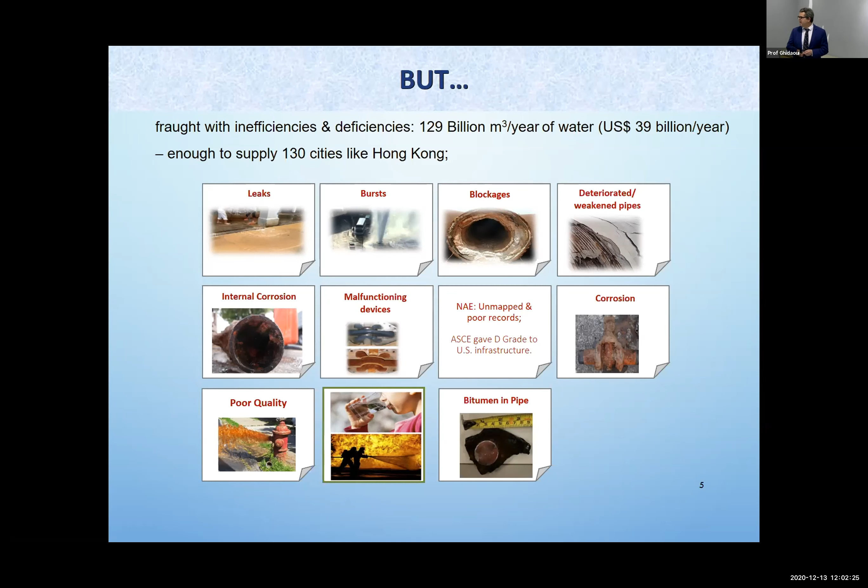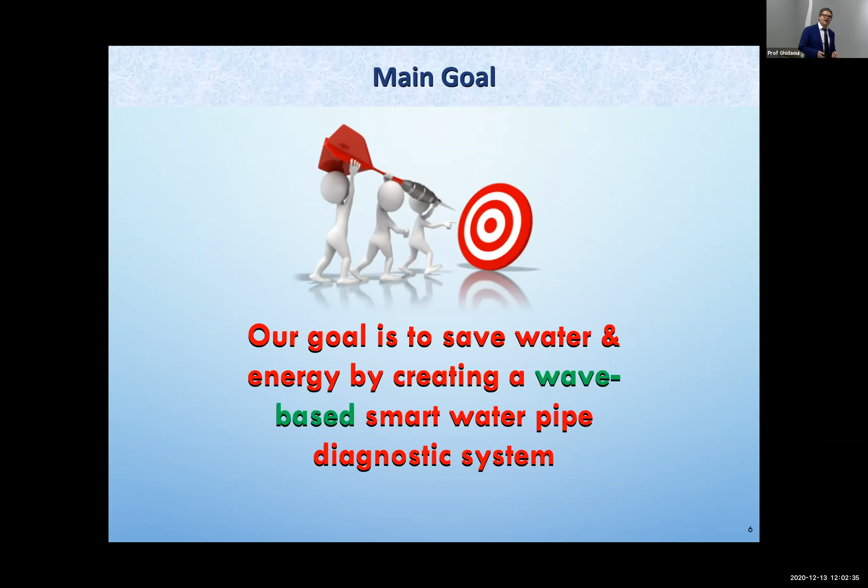So when we started, our objective was to develop a wave-based new diagnostic system, so we can actually peer into the ground and see these pipes.

Waves are all around you. You hear me through waves. Your phone works with waves. You listen to me through waves. Humanity has found that waves are one of the best things: if you have a system which is not accessible, poorly known, complex, one of the best ways is to transmit a wave into it, receive the echoes, and develop wave theories and imaging techniques to see it.

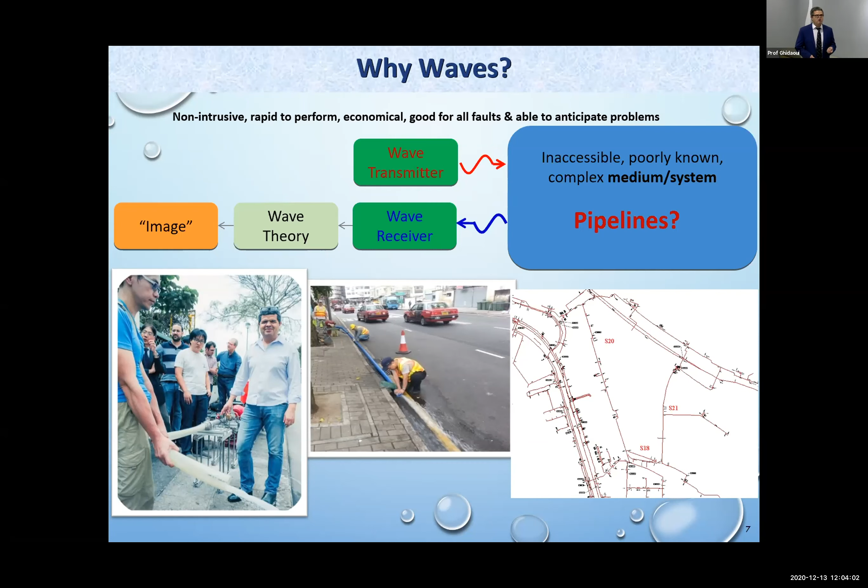So the idea was, can we do the same in pipelines? These pipelines are important, costly, and large in scale, yet our waves are fast—they travel at a kilometer per second. That means in 1 second, we could get a large sample of echoes coming back. The idea is, can we develop the wave theory and imaging to turn that into knowledge about the system? That's really where our project has been for the last 5 years.

So the mission was to understand these waves and how they propagate in pipelines much better than before, then to turn that into new and novel diagnostic techniques. Of course, we also needed to develop the experimental methodologies, labs, and field tests to confirm our findings.

So where are we in all of this? When we started, you start with what you know and try to build on that. We did that for about a year and a half. We were progressing, but frankly, I must admit we were not progressing at the rate I wanted to achieve all of what we promised to do.

So we needed a fresh look. We needed really a paradigm shift. We needed to think of these things in a totally different way. So of course, we wanted to see what others have been doing in other fields. It occurred to us: what are these people doing in ocean imaging, in medical imaging? What are they doing in ocean acoustics?

One of the common things that kept coming back is the time reversal of waves, which we had not attempted at all in our field. So that was something we had to learn. It became a mission in itself.

It was a lot of fun, a bit of divergence for a while, but then we had to prove it. We had to prove it theoretically, we had to prove it experimentally in our system, and we have by now. Our pipes come in different sizes and different materials, and we have to show that it works on all of them, and we have.

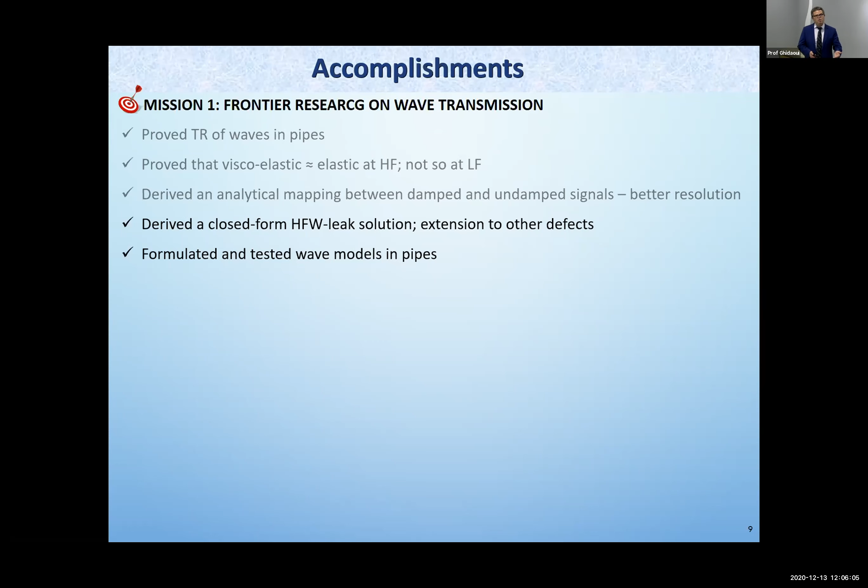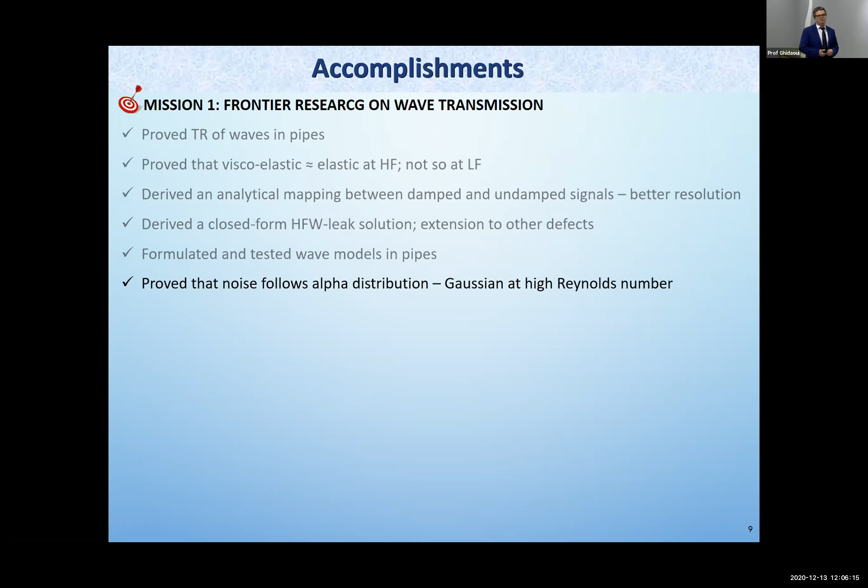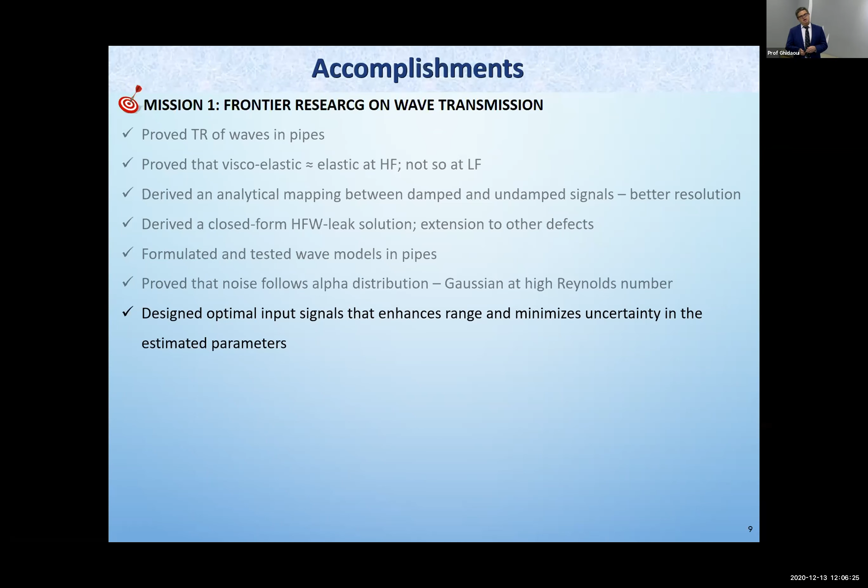Noise is a killer when you're doing diagnosis, and we now have a much better understanding than when we started about noise and noise distribution. It matters what signal you probe with. Not all probing signals are the same, and we've done quite a bit of work on that, and it's been highly beneficial.

When we started, even from a mathematical perspective, a lot of the theories had been developed with the ocean in mind. The ocean is one connected region. Pipelines are a network. So we had to make things fit to our application, but luckily we have a number of mathematicians with us to help us move forward.

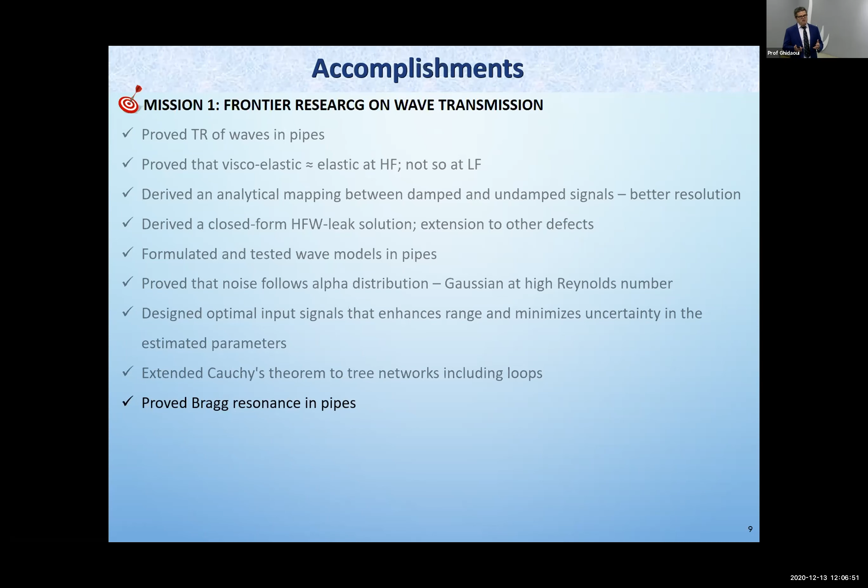We also proved that Bragg resonance is common in pipelines. This gave us a way to look at rather complicated signals and have much more insight into them.

Now that we've put in all of that, we're able to come up with a unifying framework for imaging at varying frequency. We have proved over the last 5 years that it is optimal in terms of signal to noise ratio. It's robust, efficient, high resolution, and versatile. It's no wonder it is being used in other fields.

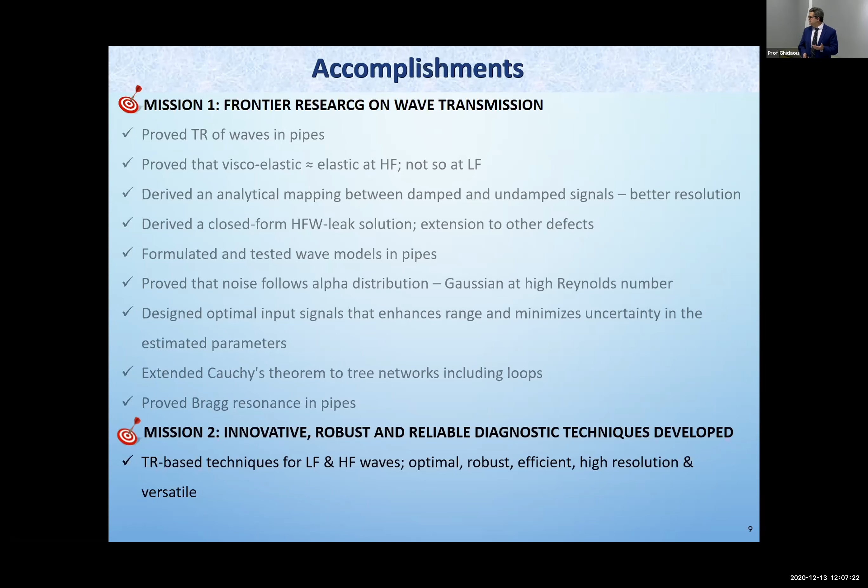Okay, so I'll come back, since time reversal is really key. I'll come back and show you a bit about it, some nice experiments that have been done by others that are visual. But in terms of facilities, let me get you to it.

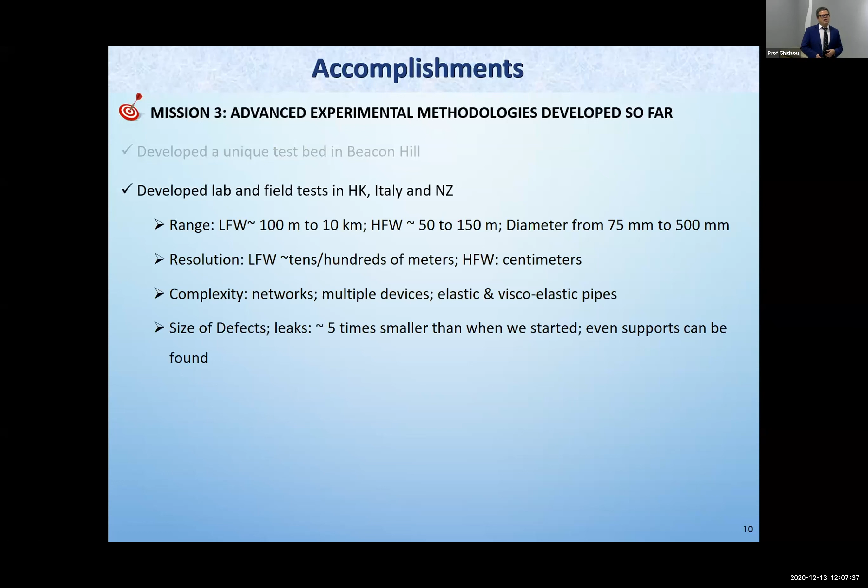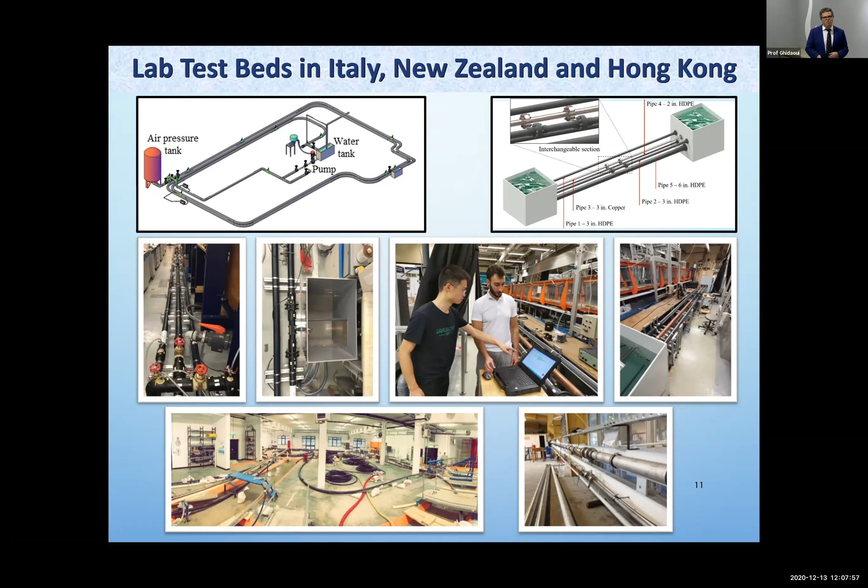So this is in our lab here in HKUST. This was built all as part of this project. We have two facilities being built, one is 140 meters long, the other about 10 meters long. These are a couple of our guys doing the testing. We also built facilities at University of Perugia through our collaboration, and this is at University of Canterbury in New Zealand.

Another signature that really came out of this is the close working relationship with Water Supplies Department. I thank them dearly for all their support throughout. They gave us this testing site. This is in Beacon Hill in Hong Kong.

This is a water supply reservoir. They have some space here, so we talked to them, they gave us the space, and now we've built a pipeline around this perimeter. These are some pictures of it. It can be about 250 meters long. We can do networks, we can do branches, we could do all kinds of testing in this facility.

Interestingly, our colleagues in Water Supplies are already using this to train their engineers to detect leaks through listening. So they've been using it.

So with the addition we have now, our vision together with Water Supplies is to make this a center, a place where smart water technology and new developments can come in, can be tested, whether it's ours, whether it's others, whether it's from different places. So hopefully we can develop this in Hong Kong. It's connected to the water supply. Hopefully we can develop it, and we're happy to have this major facility.

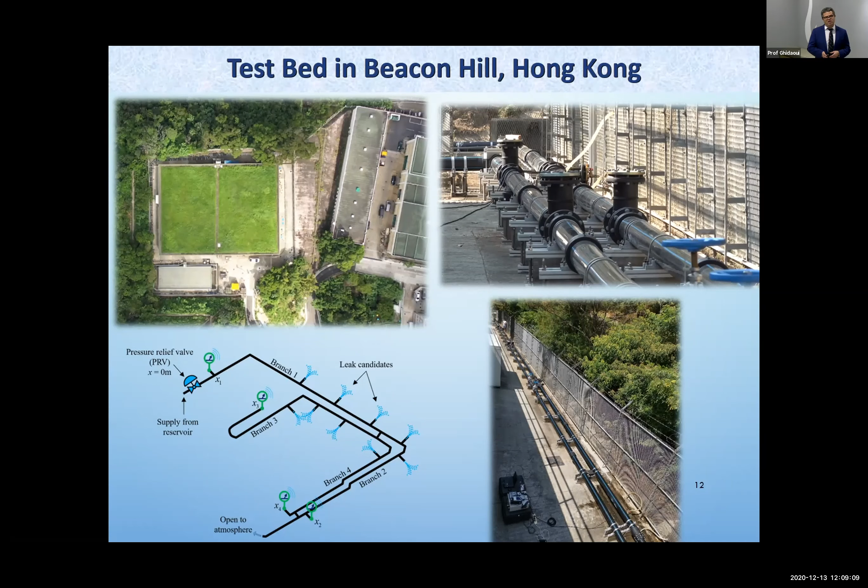This wouldn't have happened without the close working relationship with our colleagues in Water Supplies. Moreover, they were able to give us 3 testing sites in the field, so we tested in 3 places in Hong Kong. We also have 2 tests that were carried out in Italy, and I'll show you the results of those.

But now going back, as I said, one of the new things that really happened here, and we didn't even expect we'd get there, is this idea of using time reversal. We were not aware of it at the time of the application.

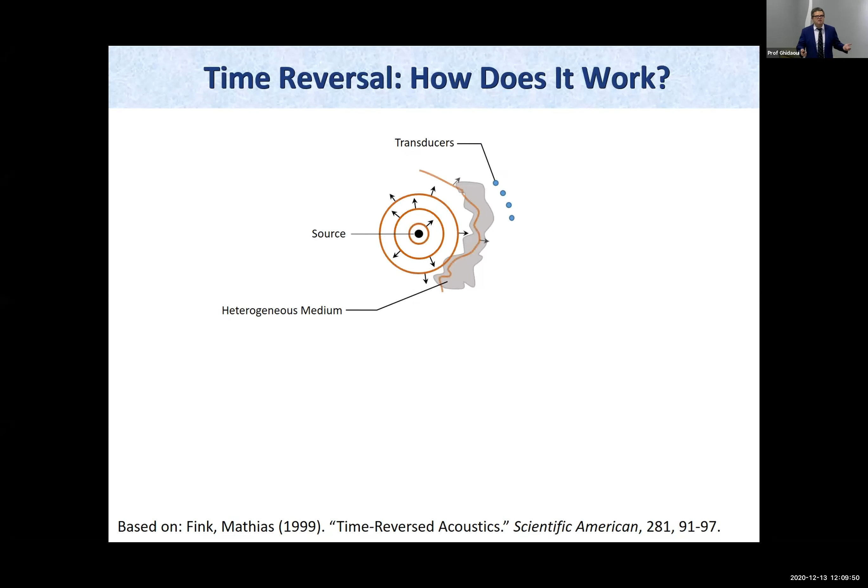So when you have a wave, there is a wave source. That wave source could be a stone. You throw a stone on a pond and you get ripples. These are the type of ripples that all of us, our eyes are used to. Imagine you have a sensor collecting the pressure at 3 or 4 locations. The principle of time reversal tells you: you take what you measure there, you flip it in time. That means you send last in, first out.

You change the chronological order. This becomes your source. And if you make those your source...

One intriguing thing about waves is they refocus back to their sources. They tell you where they come from, they go home. How sharply they refocus is actually proportional to frequency. So if you use higher frequency, you get higher resolution, more sharpness. But for us, high frequency means more damping, so we had to optimize this. We build our project around low and high frequency, and I'll show you more of this.

But this is really intriguing, you can find this on the web. It's an experiment done in Paris to show time reversal in something we can see and visualize. So they're going to drop a stone here from the ceiling.

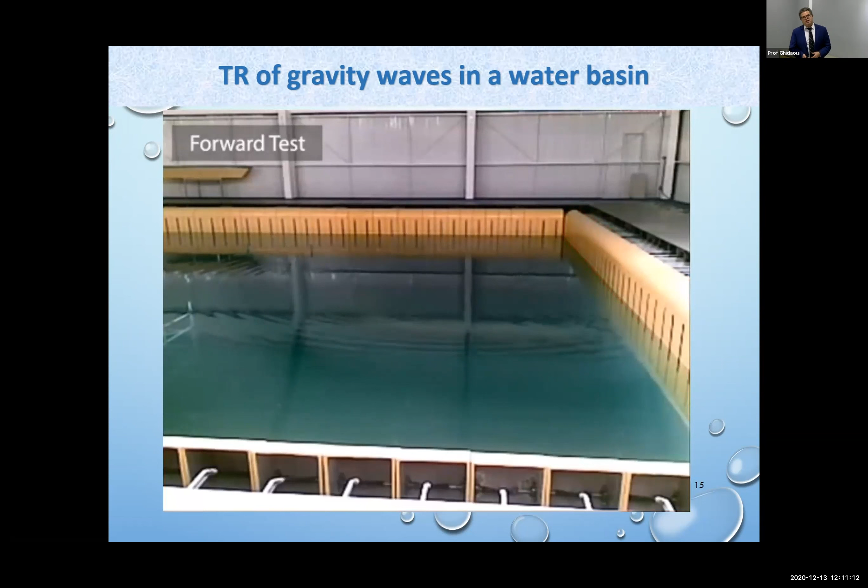The stone comes down and generates ripples. What they did is measure the pressure, or water elevation, at a couple of places. Nothing really earth-shattering about that, we'd all expect it, you see a stone, there are ripples. The intriguing part is what they're going to do now: take whatever they measured, flip it in time, and that becomes the source.

Just bear with me, because the end result is really worth it. It's cool. So now these become the sources, what they measured. We're going to speed through this video to gain some time, and slow it down when it's doing what waves like to do when you send them back.

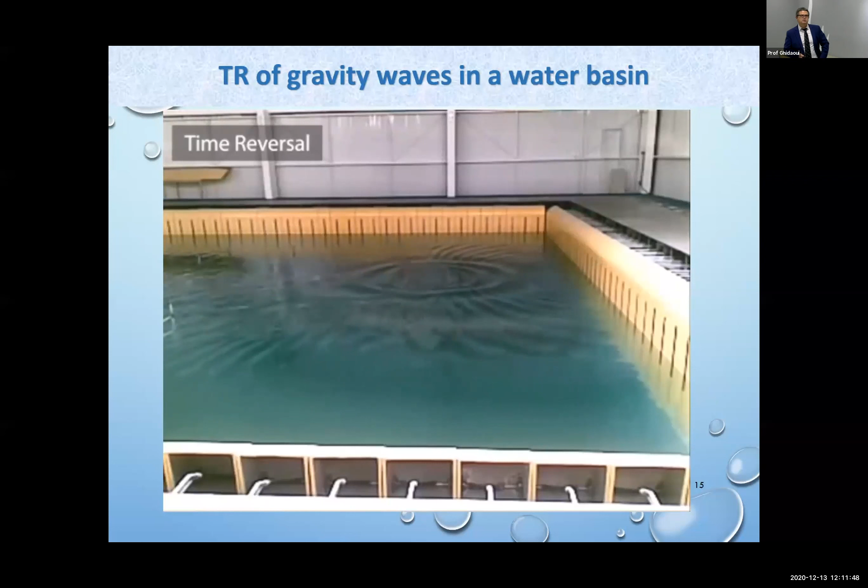So observe what happens. The wave refocuses back. You see the water splashing where the stone used to be. So it actually tells us where the stone went.

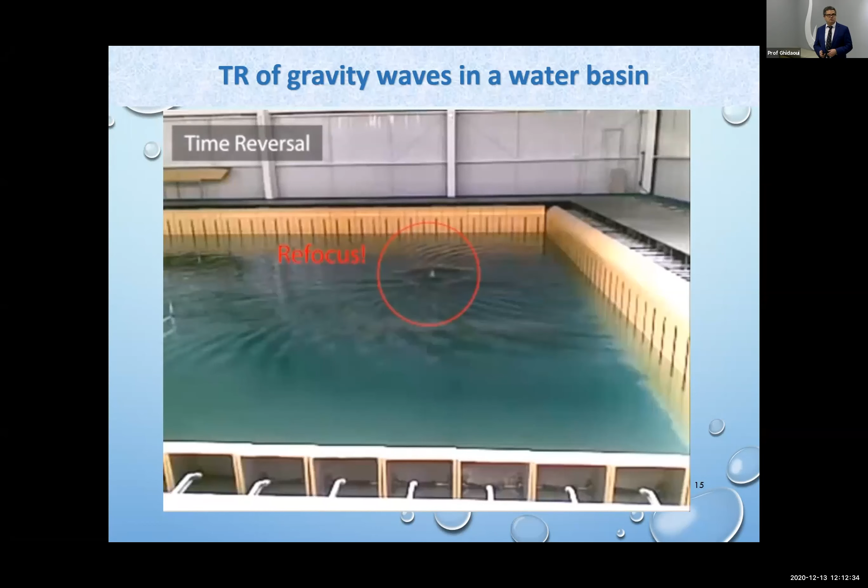So what this meant to us, seeing things like this, is that if I'm standing here measuring, and let's say you plunge into a pool or threw something in, I don't need to know where you are. I could measure and send it back to find you and find the source. To us, already signs were coming: leaks are sources, pipe junctions are sources, pumps are sources. So maybe we could turn all of this around, time reverse these waves, and they will tell us. That was really the initial thing about us starting to look at this.

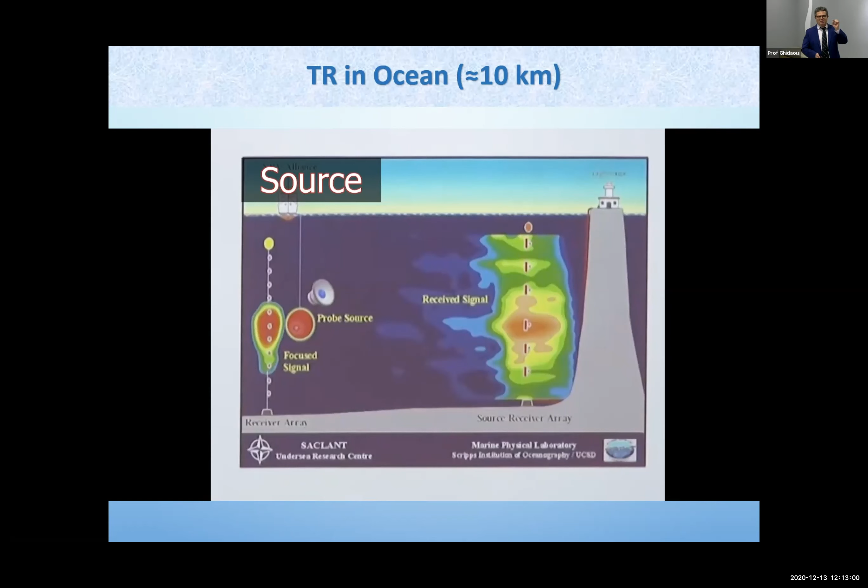Then we looked, because that was gravity waves, at acoustic waves, so we looked at what people were doing in ocean acoustics. This is an experiment, I believe done in the Mediterranean Ocean. They send a wave from here to about 10 or 15 kilometers away, and what they send is a short blip, a short compact source. So we'll hear in the video a blip, a very short sound, and then you'll hear what they're going to receive.

Now, what they're going to receive about 10 kilometers away is a very elongated signal, what we call echoes. You know when you speak in tunnels you get those echoes. Why are there echoes? Because waves go directly, but also zigzag up and down to get there, so there's a spread, what's called dispersion.

This is very nice for us because this could be thought of as the pipeline. This is our water, these are the walls of the pipe, and we have these, as I'll show you later. Now notice what happens when they time reverse this.

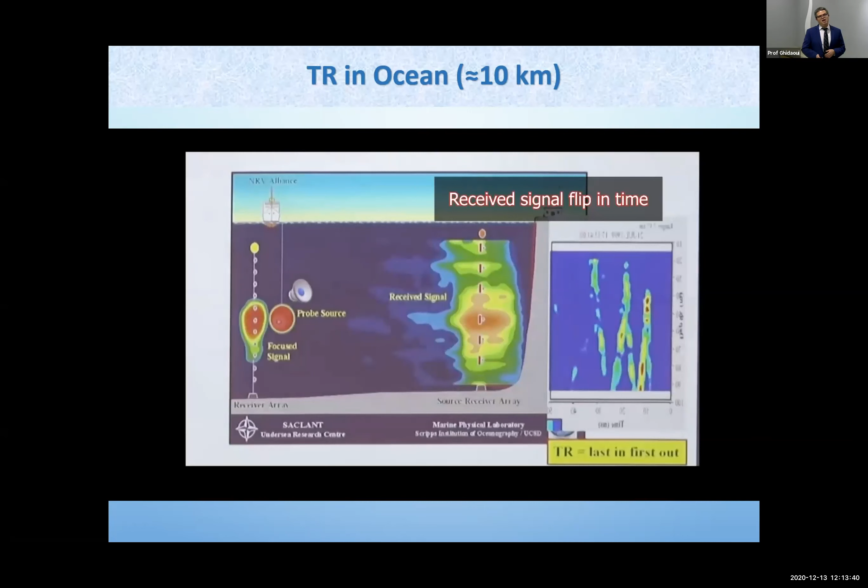So they took what they measured here, time reversed it, and they're going to send it back in the ocean. And you see, you get the compact source back. So the source refocuses again, collapsing into a short period at 10 kilometers away.

What it means again here: if there was a whale singing here, and I'm measuring elsewhere, I don't need to know where that whale is. I could just measure what I get, reverse it, and it would locate it. So these are great things at locating sources, and that's what we are after in this project.

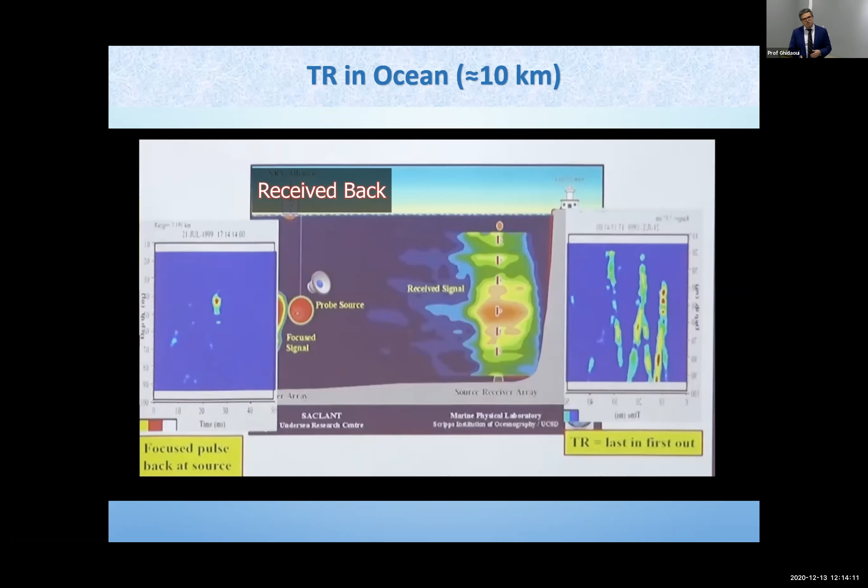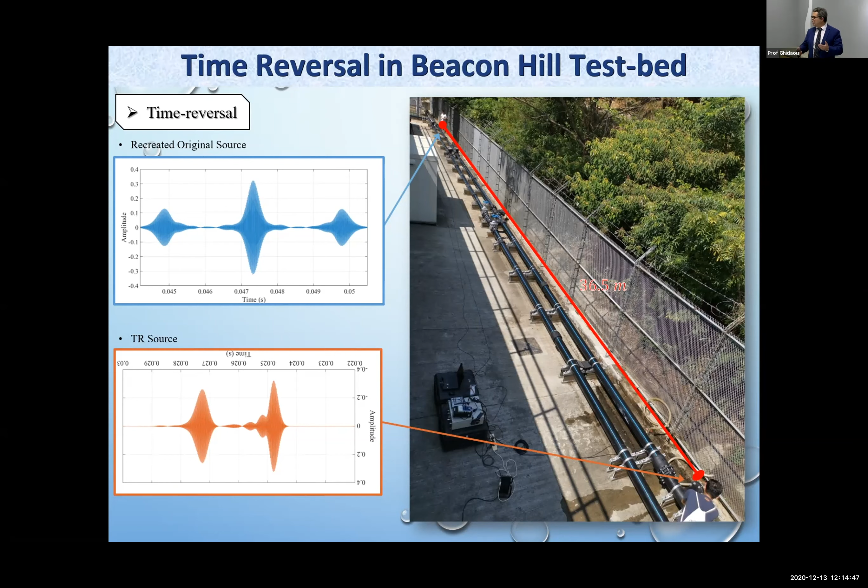So now we time reverse it, send it back, and we get the refocusing exactly at the location, but we get these side lobes. Anybody who worked on this as a scientist will know these are artifacts from the fact that you don't measure at every point, or don't measure long enough — we call them side lobes. In fact, maybe you didn't notice, but we already saw side lobes earlier: this is the focus, we know where the stone was, but there are still some ripples.

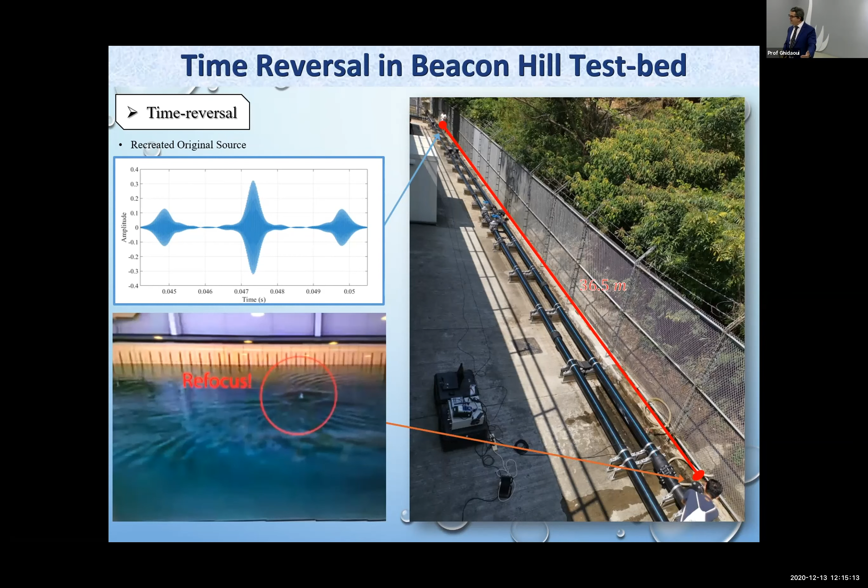If you want to get rid of these in these experiments, you measure at many more points and you will see only the signal and everything else will be quiet. What it means is if we want to get rid of this in practice, we need to measure at more places, but our system is not accessible, so we have to deal with these side lobes.

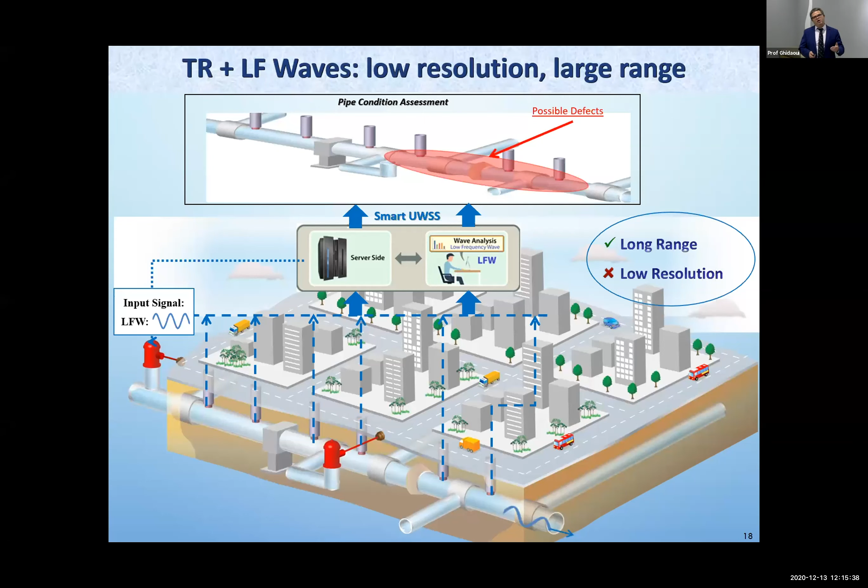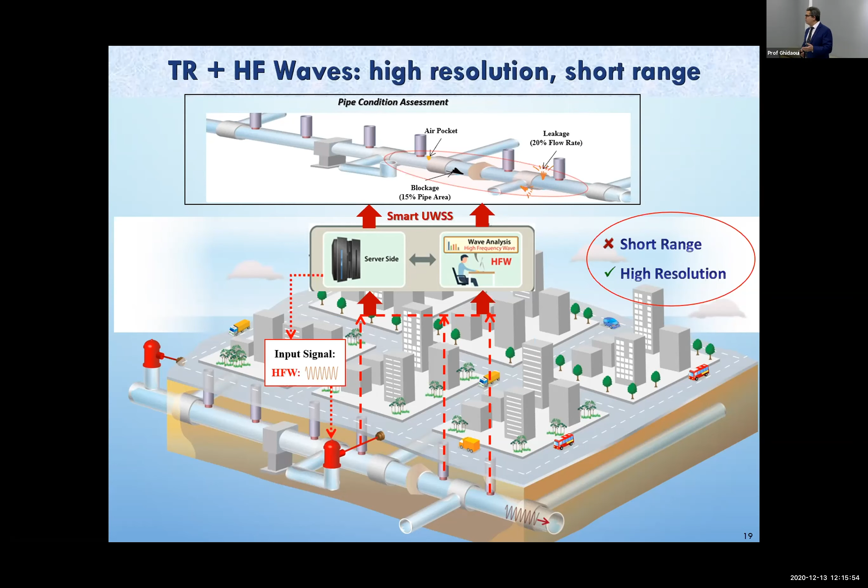Now that we proved time reversal for us, let's see how we test it. We're going to split this into low frequency and high frequency. Why low frequency? We send low frequency waves because they have long range. We can test kilometers of pipes in a few seconds. That tells us, though, low frequency has low resolution, meaning we can only tell defects within tens to hundreds of meters. The idea is once we are close to where defects are, we go in and hit it with high frequency, and we'll be able to precisely determine location, down to the order of centimeters. So let's see how we work with low frequency time reversal.

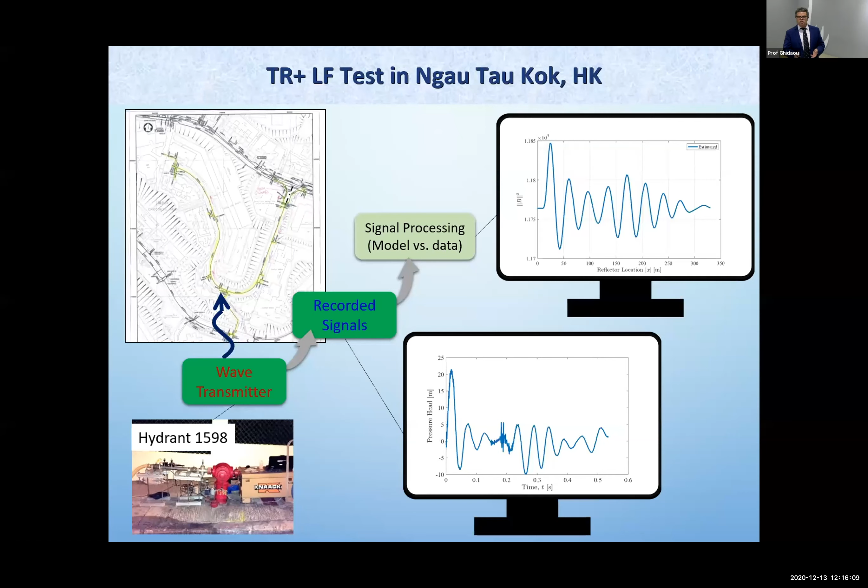This is a test that we've done in the field in Hong Kong, in Ngau Tau Kok. I think this was about 700 meters long. Send a wave, receive it. Notice we only need to collect about 0.6 seconds of the sample. This is, by the way, all automated now. Get the data, it all goes to the computer.

The time reversal gives you an image, like we're trying to emulate what that doctor was doing with a patient, and in this case our patient is our pipeline. So we want to see what is inside it. We see things that are already there, connections and so on, and those all show up in the time reversal, but we also see new things.

We saw a hydrant line that was not on our maps. So we contacted our colleagues in water supplies, and they confirmed that indeed there was a line there, but it was not on our maps. They also had a pressure reducing valve. We knew they did, but they told us it was out of commission. In one of the tests, we believe our results were telling us it's working, something is happening. So we contacted them, and indeed they confirmed it was back online.

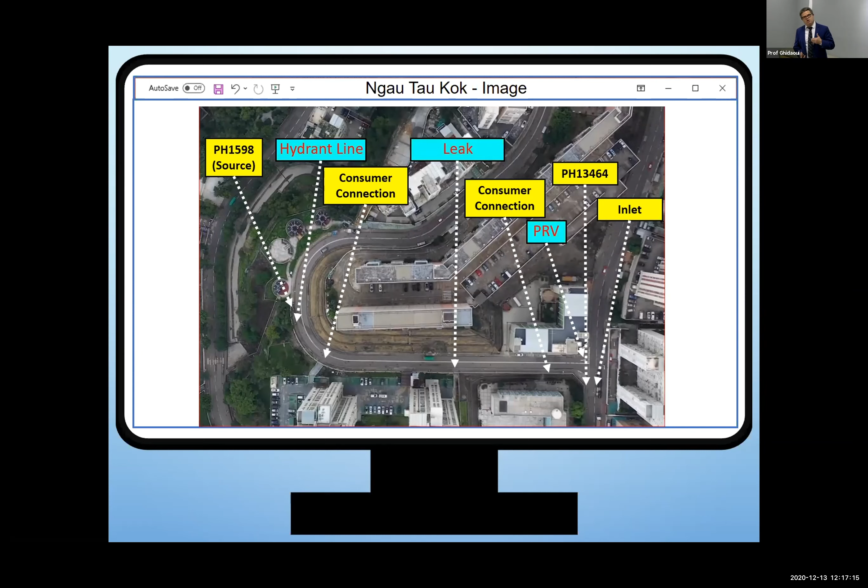So the point I'm trying to make here is this is not a leak finder. It's actually a way to map the whole system. It's a way to find things, junctions and so on that you didn't know about. It's a way to tell you whether your devices are working or not working. It's a way to determine new defects.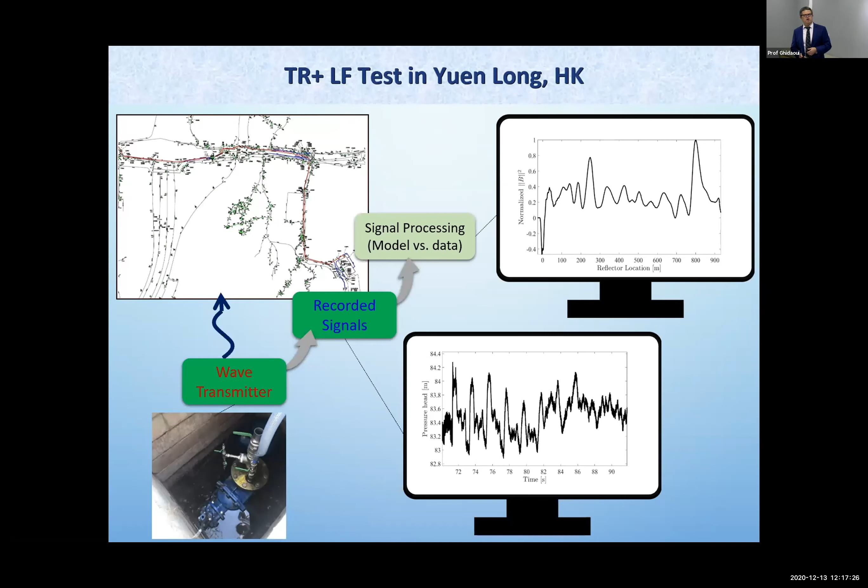We tested this also in Yuen Long in a 1.5 or 2 kilometer pipeline. Again, send the signal, receive, do the process, and get the image. In that image, we suspect there are 2 leaks. We are talking to our colleagues in the water supply department to confirm it. Of course, we need to dig, and to dig, we need to get permits. This is a major highway, so we need permission, and we haven't done that yet, but that's where we are suspecting there are 2 leaks.

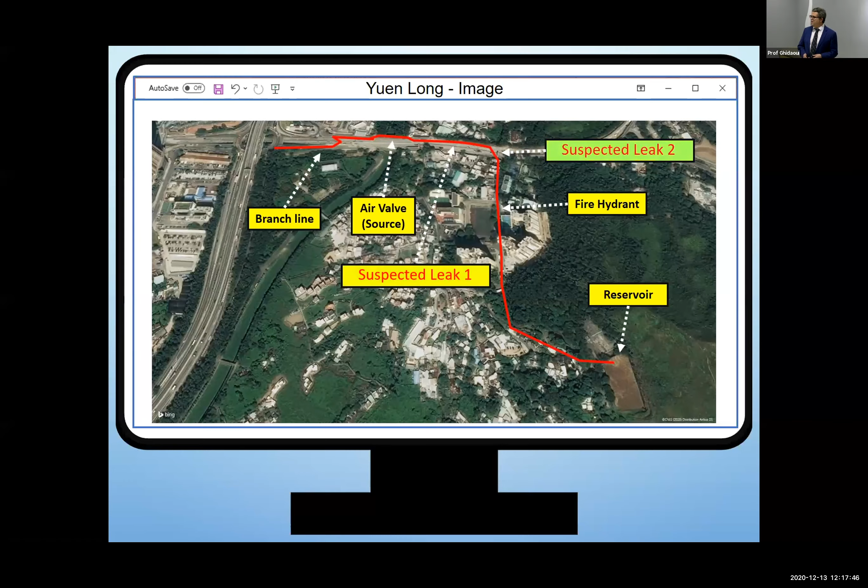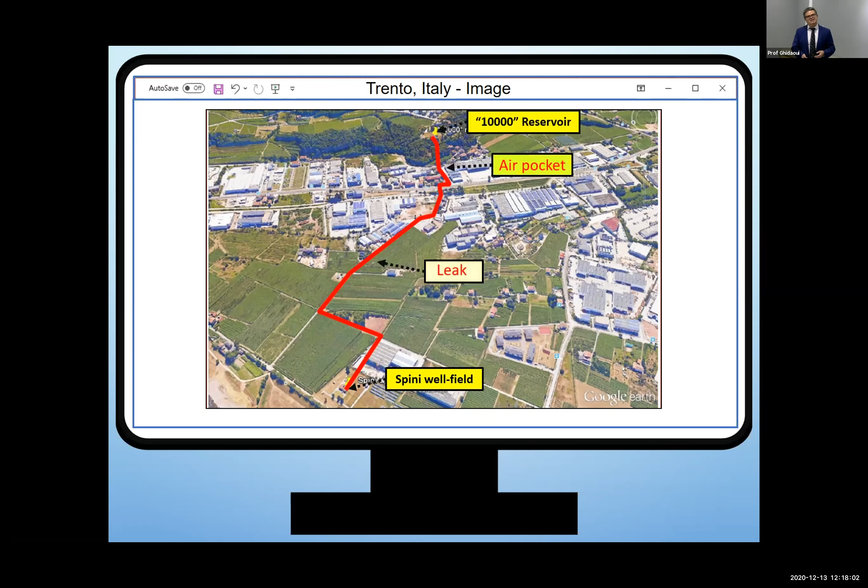They suspect there are leaks as well. We got data from Trento in Italy. Our colleagues collected that and sent it to us. We applied our methodology and detected there is a leak and an air pocket. In this case, it was actually verified in the field.

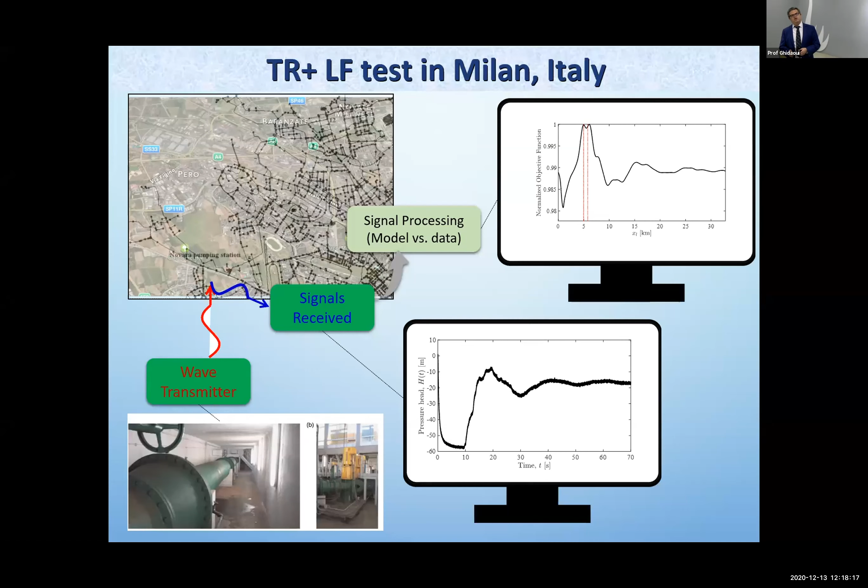This data predates our project. It was done in Milan over, actually, about 10 kilometer distance. We wanted to see the range, so we tested it, and you see we get double peaks. These double peaks imply that we have multiple defects, and in fact, when they dug in Milan, they found a number of leaks bunched up together.

This is another interesting one. Early on in the project, the water supply was collecting real data in Hong Kong, in North Point, and they were seeing each day at 4 o'clock a drop in pressure. The question is, what causes it? What is the source of this?

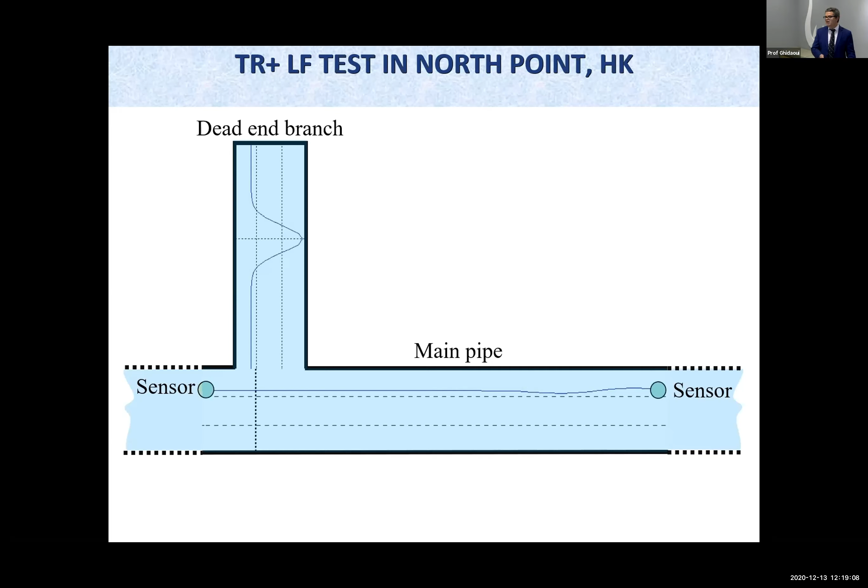And then we need to check. In checking with them, it was confirmed. So this is where we would predict, and it was confirmed that indeed there is a government truck that comes around 4 o'clock and fills up with water. So every time it fills up, there is a drop in pressure.

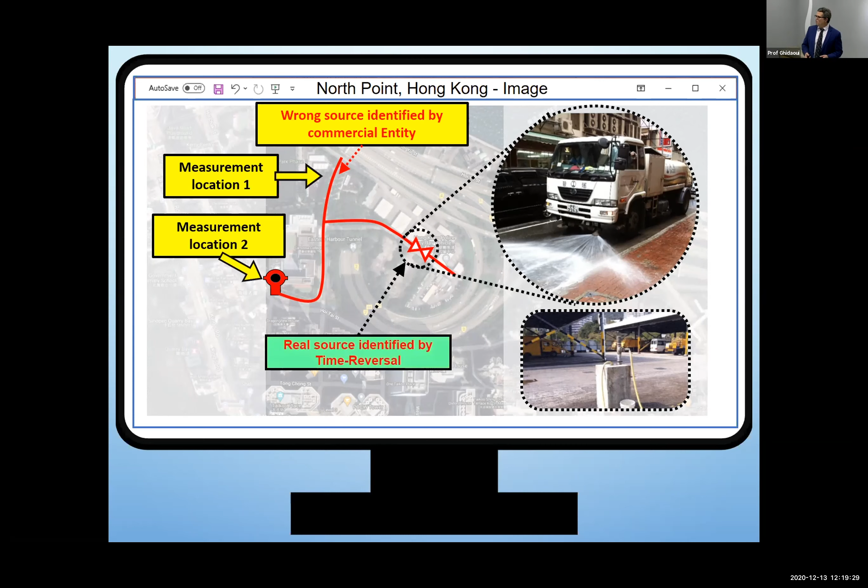So again, this is not a leak finder. It's for finding somebody who is tampering with your water, where it could be used. But the limitation is that with low frequency, you can only tell to within tens of meters, and it's costly to dig within tens of meters. So we want to get closer, to the order of a fraction of a meter, hopefully. And that's where high frequency comes in.

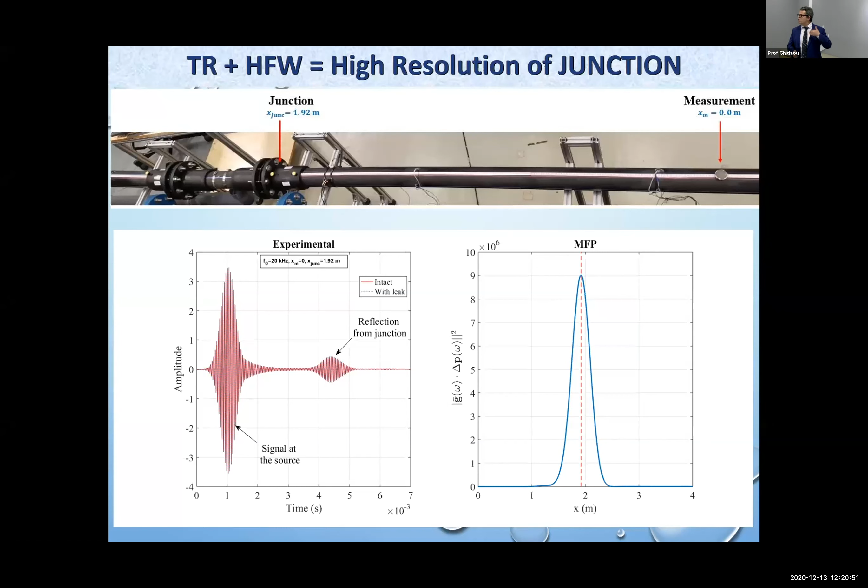We wanted also to see if we can find junctions with these high frequency waves. Can we actually localize the junction? We do. This is very important practically, because a lot of leaks actually occur at junctions of pipes. And when pipes get older, these junctions start to become loose. If we apply this time reversal, we'll see changes here, and that will tell us these junctions are starting to move. We can fix the problem before it becomes very large and we get leaks and sinkholes.

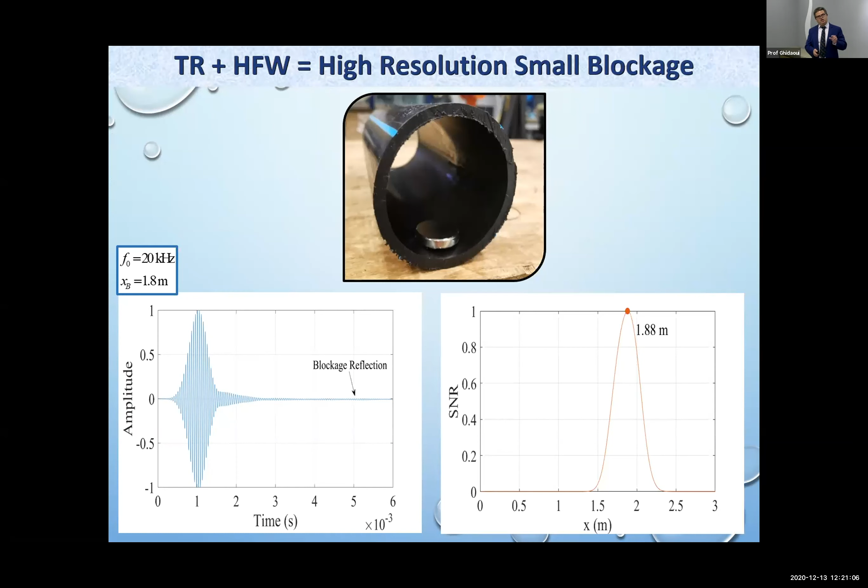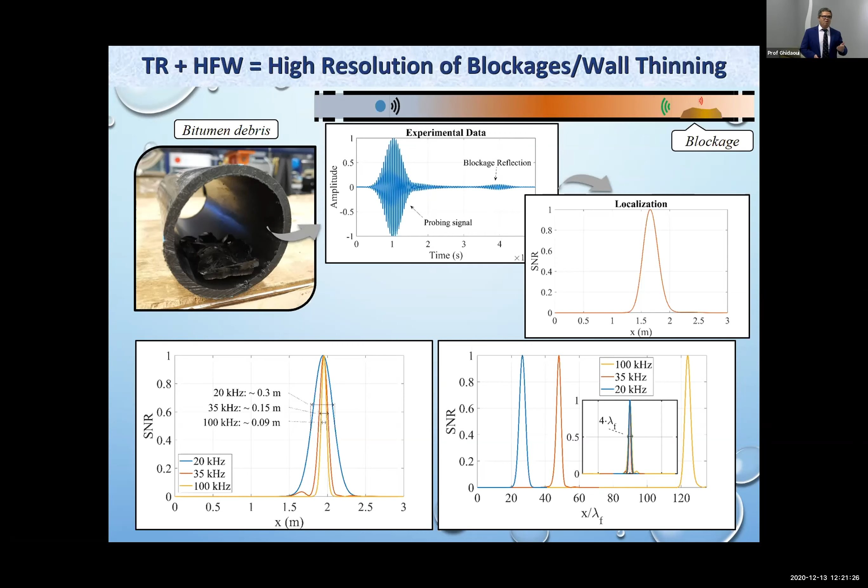Problems also occur inside, as you saw in the earlier picture - you may have noticed there is corrosion. So we want to see if we can localize things as small as a magnet here, which we did. We also asked our colleagues in water supply, and they gave us lining from a pipe. We put it here and we can find it again to the order of centimeters. This is a way of telling us in the future that we don't need to wait for the pipe to crack to know something has happened. We should be able to see problems when they start to occur, when these linings start to peel off.

Through the work we've done in the last 5 years, we have 8 test beds that we developed. We have 1 patent filed and 3 in progress. We've been working very closely with the water supplies department, as you've already seen evidence for. We have labs together, we are testing in the field together. In fact, we recently got a project from the drainage services department because they have 200 kilometers of pipes that are also pumped, so we've been trying to apply some of this knowledge there.

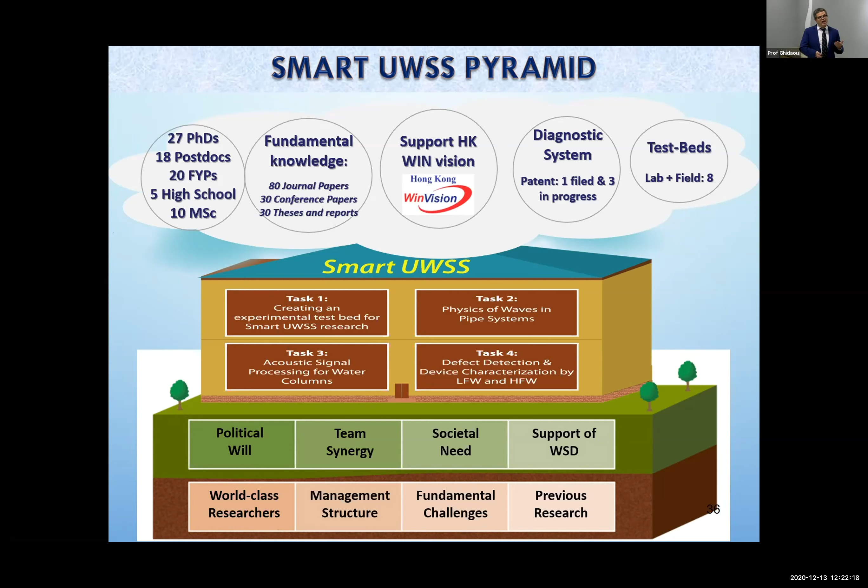We developed fundamental knowledge encapsulated in 80 journal papers, 30 conference papers, and 30 theses and reports. We trained 27 PhD students, 18 postdocs, 20 FYPs, 5 high school students who spent time with us, and 10 MSc students. Some of these students and postdocs are here, but they are now everywhere in the world, making their own impact.

With all of this development, the theories, the labs we have, the human capacity we develop, we really are poised now to save water and energy. Just to summarize, we are losing about the equivalent of what would supply Hong Kong, 130 times Hong Kong. We're losing direct costs of about $50 billion around the world. So surely, if we can do better than this, we will increase the wealth of cities, reduce interruption, improve sustainability, strengthen security, resist climate change, reinforce resilience, and enhance urban health. That's what we truly want.

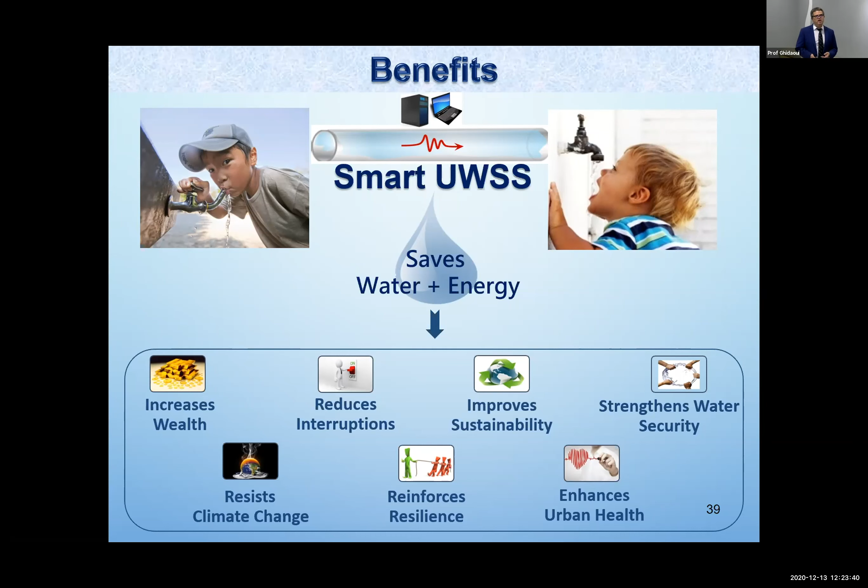The only little price you pay is I had more black hair when I started, now more white hairs. I have more pounds on and more wrinkles, but that's a worthy price to pay, I think, for what we've done. Thank you very much.

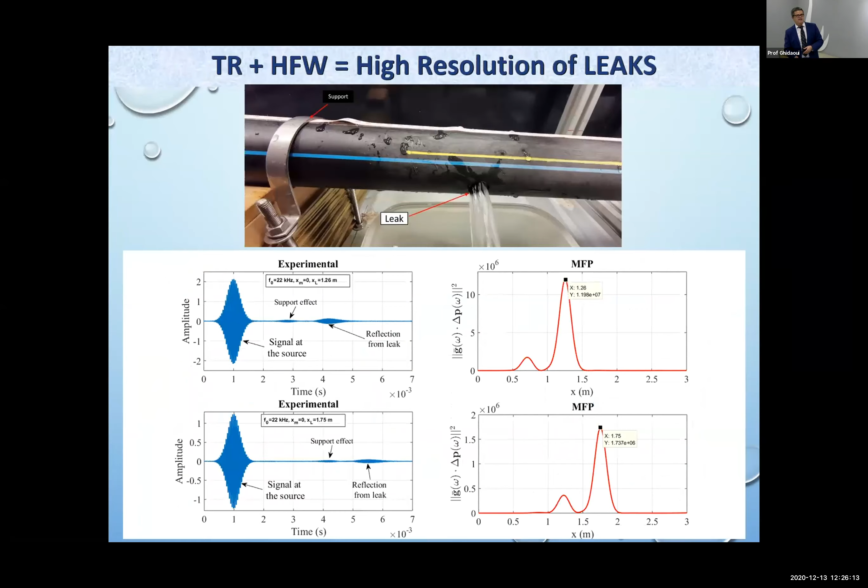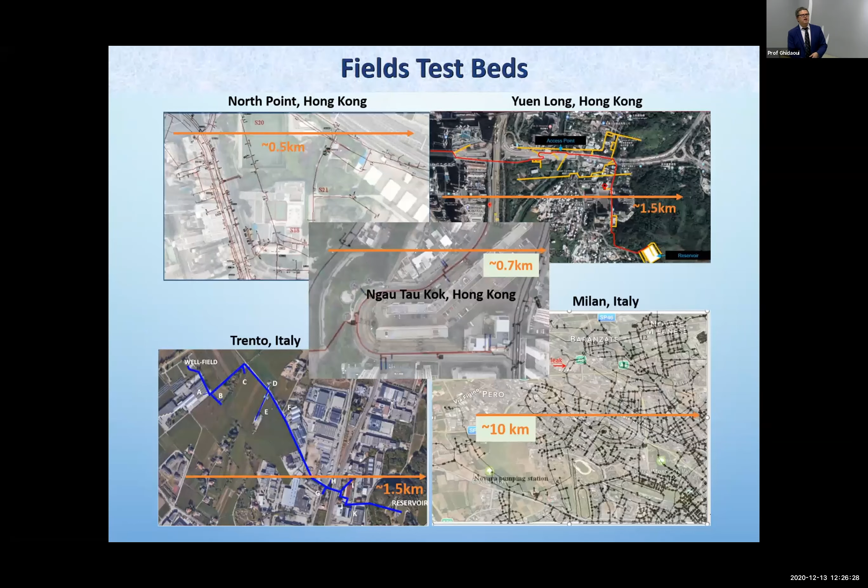If we can't see the patient... Maybe if I scroll back - this is the problem. Historically in civil engineering, maybe we had more pressing issues, so we didn't think of this. But let me get you back to - how do I do this... okay, sorry, bear with me, I'm trying to get there quick.

Thank you, Professor Ghidaoui. Here is question 2 from Peter: during the receiving of the source and the time reversal signals, there may be some background noise - how do you clean this noise, and what is the error of the noise relative to the real location of the source?

When we did this work with our colleagues in electrical engineering, who led that work, what they found is that with flowing water - which luckily we have - the distribution of the noise tends to be Gaussian. And with a Gaussian distribution, these time reversal methods are actually optimal, in the sense that they maximize signal to noise ratio.

So we tested it. We are now at a level where we can get - what was the number - I think it's a signal to noise ratio of about 10. So as long as we have a signal to noise ratio of about 10, it's working so far. Of course, we want to push the boundaries more, but that's where things are now.